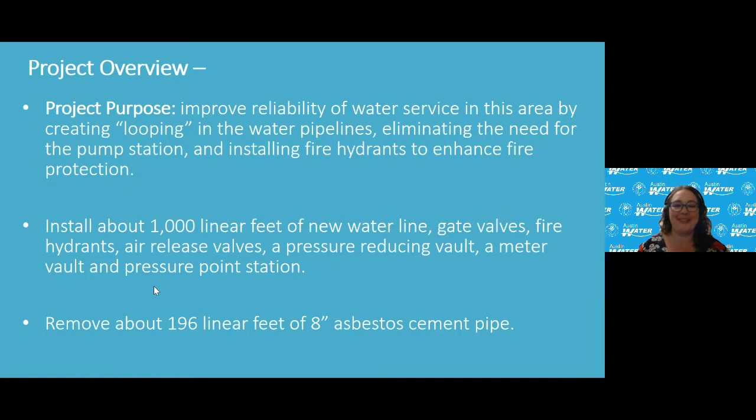Thank you all for coming in tonight. Let me turn on my video—sorry if I'm trying to make better light. Okay, the project overview: the project purpose is to improve reliability of water service in this area by creating looping in the water pipelines, eliminating the need for the pump station, and installing fire hydrants to enhance fire protection.

The project is going to install about 1,000 linear feet of new water line, gate valves, fire hydrants, air release valves, a pressure reducing vault, a meter vault, and a pressure point station. We're also going to remove about 196 linear feet of 8-inch asbestos cement pipe.

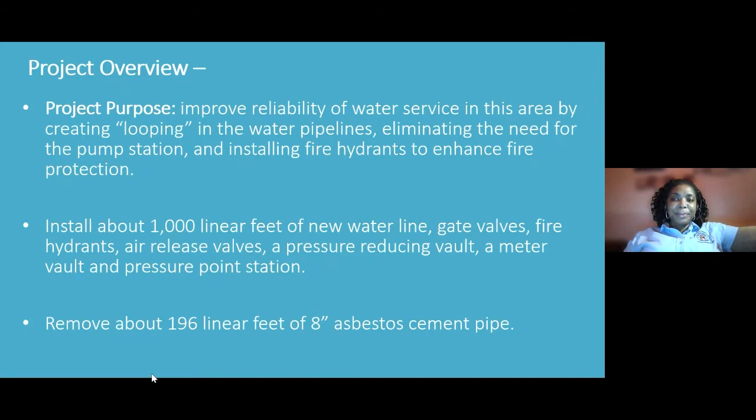The project also consists of constructing a ductile iron water main connecting to 2 different water pressure zones to provide redundant water service to the area. Currently, 16 residents receive water from the pump station. A back loop to this area provides flow to the residents and backup flow to the other residents downstream. Flow meters are proposed as part of Austin's leak detection program.

Instrumentation, supervisory control, and data acquisition, and appurtenances are proposed to provide automatic digital data transmission to Austin Water Central Command Station to help quickly identify unusual high water demand, which will indicate a potential break.

The existing water tanks and pump house will be decommissioned and removed from the property.

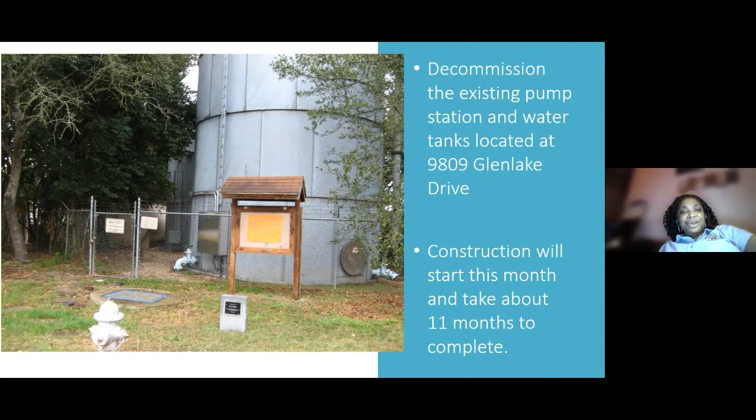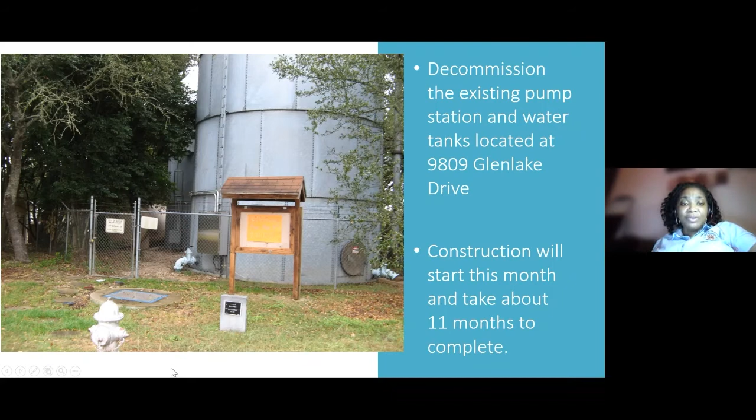The project is primarily in the City of Austin right-of-way, and during construction, detours are proposed for lane and intersection closures which will be administered. At no time will there be a situation where you have no access to your properties. Delaying execution of this contract would prolong substandard facilities and could result in disruption of water service to the residents. So that's why this is an important project for the water utility.

Emily, would you like to go back to say anything else? No, I just had the map up now.

Do you want to kind of describe the map a little bit? Okay, I'm trying to pull up my screen. Sorry.

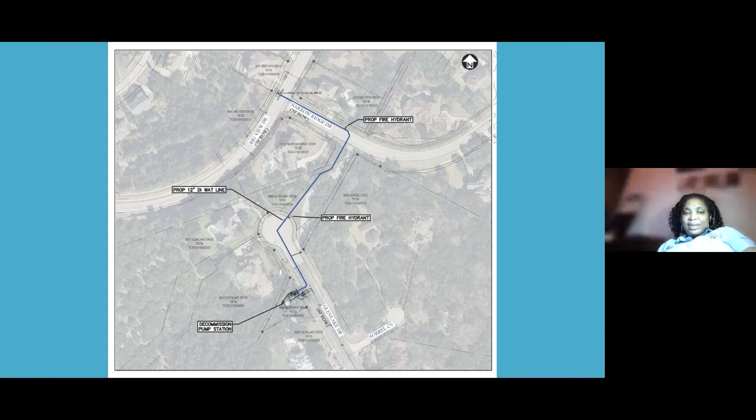Would you like to go in and think about the map of where the locations exactly are? Yeah, I think the project...

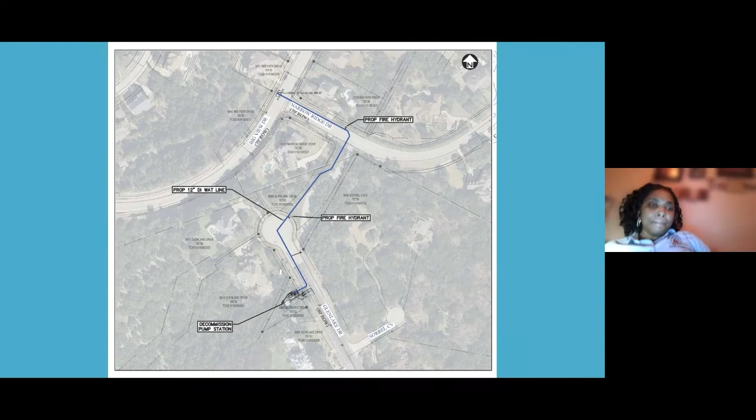We will mainly install the 12-inch water line. On the map, that's the blue line, the water main, and then connect the water main to the existing pump station. We will install 2 fire hydrants, one on Narrow Ridge Drive and one in the cul-de-sac of Glenlake.

After the install, we will temporarily remove the big tank first, and then install the PRV and flow meter. After finishing the install and connecting to the water main, we will demolish the small tank. Then the last step is to remove the asbestos cement pipe under the pavement.

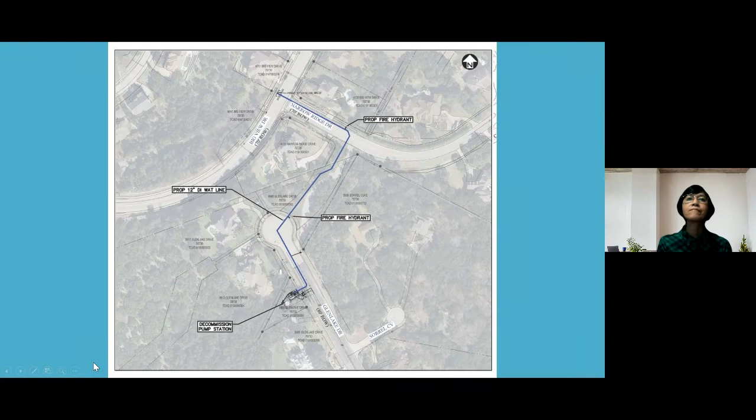Okay, and Mr. Tiger, are any of the contractors online, or would you like to go in and explain anything pertinent that the residents should understand as we move forward? Do we have a contractor available? Going once, going twice? Or I'll be happy to step in.

Can you hear me? We do now. I think they just came online. Okay, thank you. So you can hear me, sir? Please go ahead, we hear you. Please move forward.

Okay, I just want to say that as far as accessibility, I don't see that affecting any of the residents. The water line goes on the edge of the road, so they'll have plenty of room to get by. It's just the water line that's going to be on the street. Most of the other work is inside the pump station site, so that won't affect anyone.

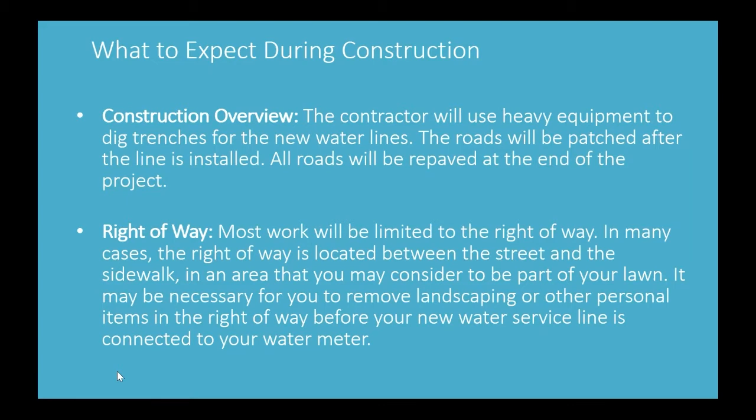Thank you. We do have a couple of slides here about what to expect during construction. Tamira, would you like for me to present those, or can you come back to it? That will be fine. I can chime in if there's anything I need to add. Thank you very much, Emily. Sure, I'll be glad to cover these.

So just an overview, the contractor will use heavy equipment to dig the trenches for the new water lines. The road will be patched after the water line is installed, and then all the roads will be repaved at the end of the project. So you'll see them making progress in sections. They will patch it after they get the line installed, and then there will be repaving at the end.

Most of the work is in the right-of-way. Sometimes the right-of-way is a section that's just at the edge of your lawn, so we want to make you aware that work will be in the road and at times in the right-of-way. If you ever have a question about where that is, you can contact us, and the inspector, Carlos, who will be out there, would always be able to talk with you about that.

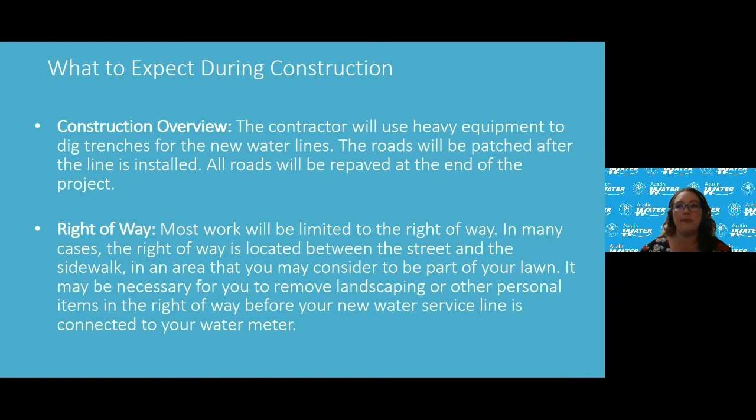It's already been mentioned that they will close a section of the road to do the construction, but you'll be able to pass, and we will make sure you have access to your property when they need to work in front of your driveway to install the water line. The contractor or our project inspector will coordinate with you and let you know so you can move your vehicle. We want to make sure you have access when you need it.

For folks who are along the new water line, at some point the water will be turned off temporarily for your service line to be connected to the new water main. We will give you 48 hours notice with a flyer left on your front door, and we'll coordinate with you. That's typically one day for a few hours.

There could be an emergency outage. Sometimes when we're doing construction, lines break. If there is a break in the line, it will be treated as an emergency and your water will be restored as quickly as possible. And then we have on the slide here the work hours that are in the contract for this project.

We want to mention that we are aware of the COVID-19 situation. Austin Water construction projects support critical infrastructure, so we are able to continue these activities during this pandemic. There are significant safety requirements in place for all our contractors and city workers, including wearing face coverings and maintaining 6-foot physical distance when possible. Sites with more than 10 active workers have to stagger shifts, and all work days begin with safety briefings and checks for personal protective equipment. Hand washing is required with a hand washing station on site, and work sites must provide single-use disposable paper towels and no-touch trash receptacles. So we are working safe and looking to make sure we continue to do that.

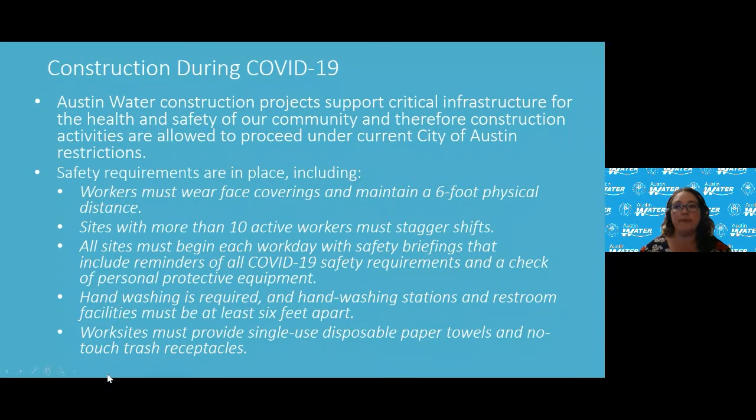I'm going to shift gears to make you aware of an unrelated project that Austin Water has underway that will be in your neighborhood soon. It's called MyATX Water, Austin's Smart Water Meter System. We kicked off a pilot project this summer, and the Glenlake area is one of the lucky ones to be in our pilot project. There are 5,000 customers in this pilot who will receive their new meters first in the city. This project will replace our analog water meters with electronically read meters connected to a wireless network.

We'll also have a customer portal that customers can use to get their water use data. On a daily basis, you'll be able to log in and see how much water you've used, and you'll be able to sign up for alerts so that if you're exceeding a certain amount, or if the system detects you might have a leak, you'll get an alert. We're looking forward to providing this improvement to our customers, and I wanted to mention it since you'll be seeing us out in your area in the coming months making these installations.

When it is coming to your area, we'll be mailing information to you and also providing information on your door after your meter has been installed. If you want to see more, you can go to the project webpage, myatxwater.org. This is just a little more information about the pilot—it will be out in the Glenlake and River Place area later this calendar year and early into 2021.

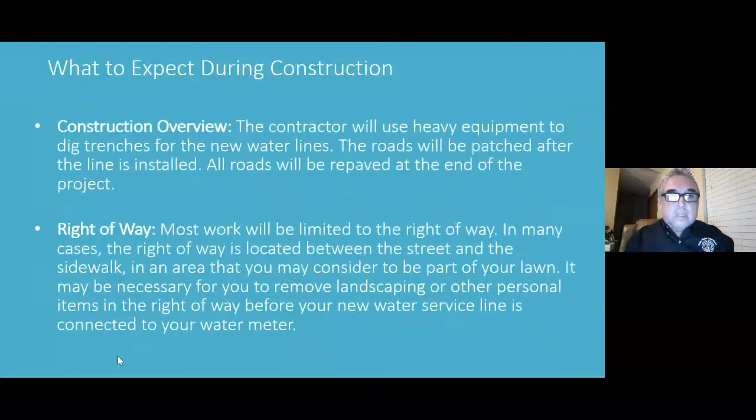Can you put the map of the water line back? I just want to let everybody know—as far as I know, the contractor will be starting on Big View Drive, and then they'll be heading north on Narrow Ridge Drive. A lot of the residents will start seeing a lot of the traffic control set up. The traffic will still be able to go in and out, but I just want to let everybody know that's where the contractor plans to start.

Thank you, Carlos, that's a good clarification. I'm trying to point my mouse here—yeah, Big View Drive and Narrow Ridge Drive. So that's where the work will start, and then we'll proceed in this direction with the water line installation. That's correct. Thank you, great.

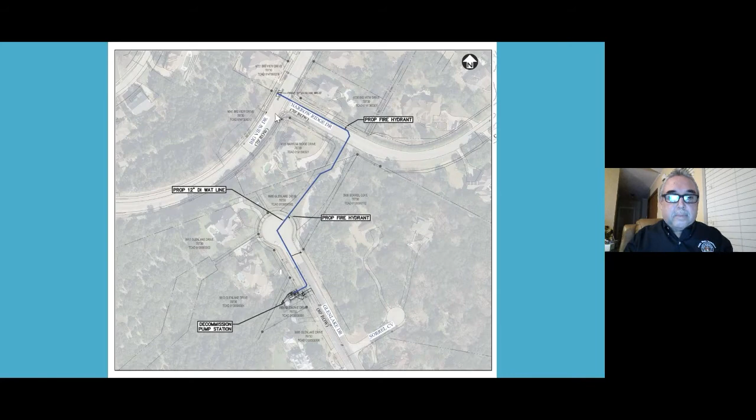Does anyone else on the project team have additional information to add before we start getting into the questions? Yes, this is Tiger Davis.

Yes, go ahead, Tiger.

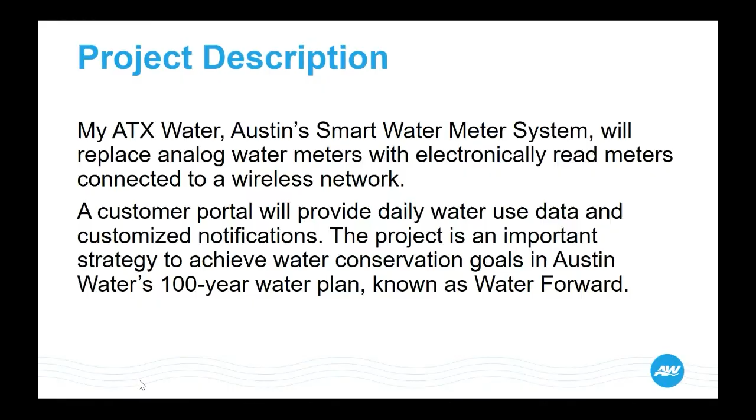Thank you. I've heard a few concerns. One is traffic control. We will change a lane, but we won't restrict access to your home. If we do need to for a few hours, you'll be given plenty of notice, and the anticipated time of any water outage while we switch over is very, very short. Also be aware, some people are concerned about their pressures.

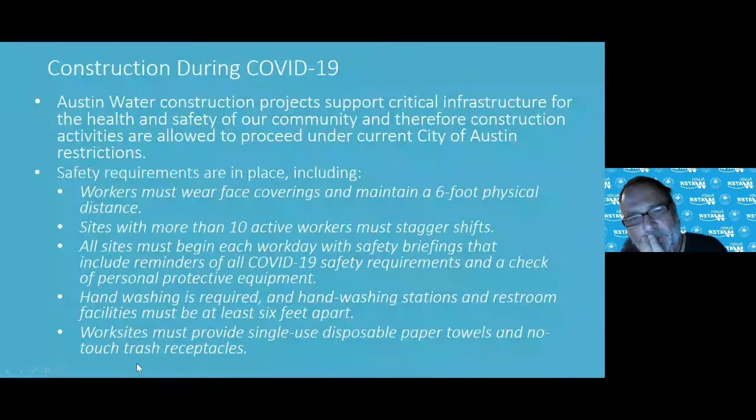The pressures will generally improve, and the reliability is greatly improved due to a redundant source. And the line that's coming in, could you go back to the map again for one moment, please? Yes. I wish we could point remotely without taking control. Yeah, I think that my mouse, if you'll describe it, I'll try to point it.

That's all right. So up there where it says proposed fire hydrant in the northern part, follow that down just south of that line. You see that tree line? That's a fire access road, and a lot of the neighbors really enjoy having that, because at the end of Glenlake Drive, they hit that cul-de-sac down to your southwest.

And I understand a lot of people like to cut from Narrow Ridge to Glenlake, and we don't really anticipate blocking that at all. We want to leave that open for what it was intended for, primarily as emergency access egress. So traffic control, not a problem. Pressure's not going to be a problem.

And then finally, in this transition, the reason we're starting up there at that Big View Narrow Ridge intersection is we need to tie into the two different systems before we do anything to start decommissioning the pump station and the hydropneumatic tank. So we're going to already have our backup before we start decommissioning the old system. That's all I have.

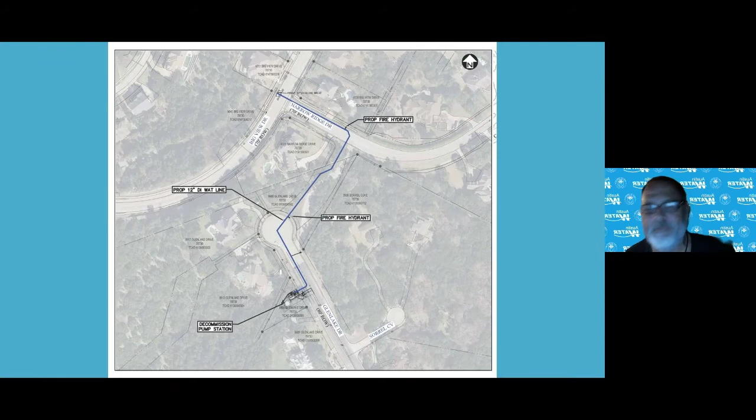Anyone else on the team want to make some comments before I start reading the questions?

Yes, ma'am, it's Demira. I just wanted to say that with the instance of private residential places, if there's anybody on the line, or there's certain places within the project, if there's anything that comes up where we're in your area and you may have property landscaping things that are in the right of way, please contact me and we'll work with you to get through those things. And if there's anything that comes up, please contact me directly.

I believe my cell phone number is on all of the information that's on the websites, and if not, I'll make sure Emily has those on there as well, because we would like to work with you all to make sure that you all maintain access at all times throughout the project, and also to just work through those little minute things that may come up where you all may have landscaping things in your properties or areas, and just work through those. So if anything comes up, please feel free to give me a call on my cell phone or email me.

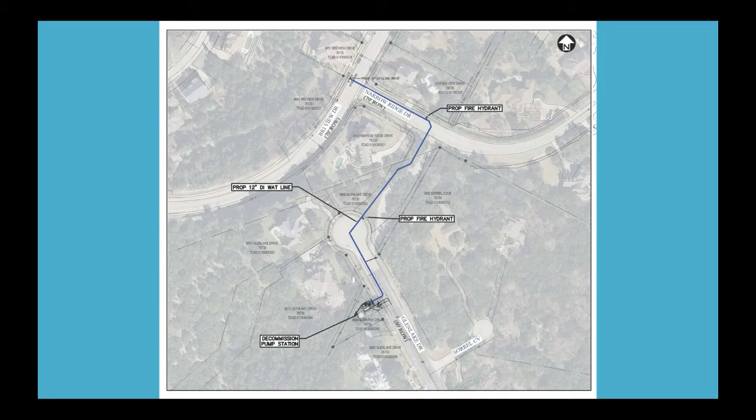Okay, so our first question is, because the traffic from Glenlake to Narrow Ridge is high, how will this intersection be kept safe? So from Glenlake to Narrow Ridge.

This is Tiger Davis again. That's actually a fire access road. The public is not restricted. There's no gate on it, but that road was fully intended to be an emergency egress road, and we want the neighbors to use it if everybody's happy with it. But the fact of the matter, as you can see, it's not a fully developed road, and it belongs to the neighborhood. Austin Water has no interest in the control of that, and we're certainly not going to block it.

And we're going to try to keep it open the whole time. But as far as it being a high volume of traffic, I would suggest you work with your neighborhood association, and if it's considered it needs improvements, that would be something the neighborhood can address at another point. But it really is not a fully developed road.

Okay, and of course I would just like to also add that there's the aspect that we're working with Travis County emergency officials, as well as Emily notifying the neighborhood associations, as well as with the city of Austin. So there's different entities working together, so it would just be a matter of us working together to get all those things taken care of.

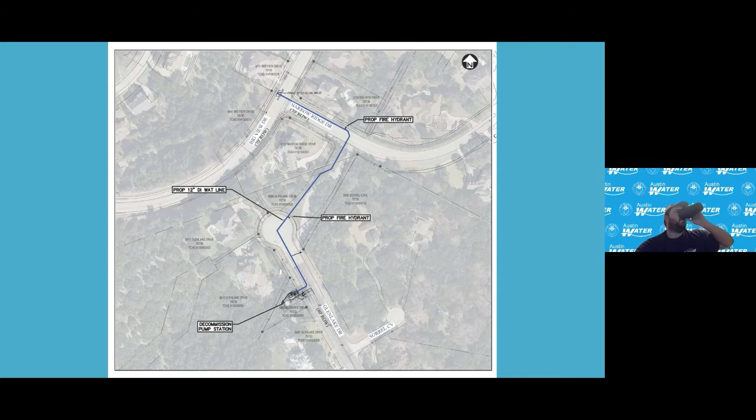Thanks, Nolan, appreciate that. The next question is, will there be times that the 911 cut-through road is closed due to construction? I think we've answered that we intend to keep it open during construction. There's also a question, will you remove the water tanks when you decommission it?

So who wants to address the water tanks? This is Tiger. Yes, once the other system is fully hooked up, as Nolan just described, we will be pulling out the little pump control station, the water tanks, and the hydropneumatic tanks. Basically, almost everything sitting there.

We are going to be putting a pressure point so that we can monitor the condition, as was described earlier. We want to know if we get a sudden pressure drop, as we're sharing pressure from one system to another. It's more likely the pressure reducing valve could fail and you might get a little extra pressure, but that's not going to happen either. It's almost going to be invisible except for the transition. Once we swap over, this is going to be basically what you had, but more reliable.

That's all, thank you. The next question was again about the 911 drive remaining open, so I think we've addressed that.

Linda tells us we have a smart water meter and it works well, but the installation caused a bad leak. What is being done to make the installation robust? I know some folks in this area were part of a very early pilot where Austin Water was first testing out these smart meters, so that may be what you're referring to.

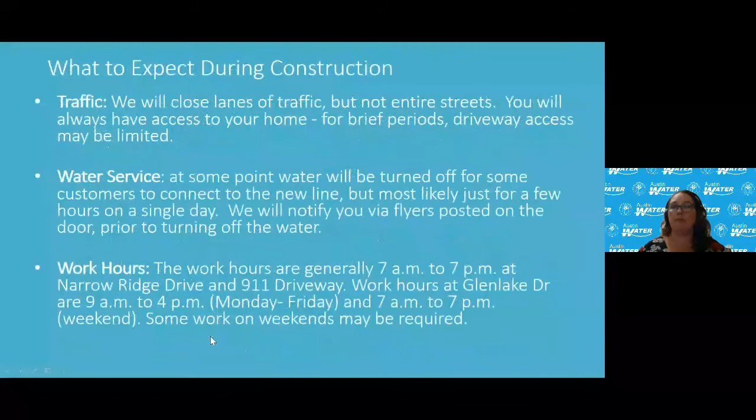Emily, this is Tiger. If you go back to the map, please. Sure. Okay, we're back on the map here.

Okay, maybe the customer that proposed the question... usually ESD is emergency services, but in this case maybe they have another acronym in mind.

And with these questions, Emily, and with everyone else, correct me if I'm wrong, there will be a form that will come out that will provide answers to questions we may not have been able to answer. So we will do a record. We are recording this meeting, and we will post a recording on the project website, and we will definitely post any additional information if we don't have the answer to give tonight.

Hello. Okay, so I just want to let everyone know that if your question doesn't get answered tonight, there will be something else where you can go look for your responses too. But, yeah, and I think someone's maybe trying to say something.

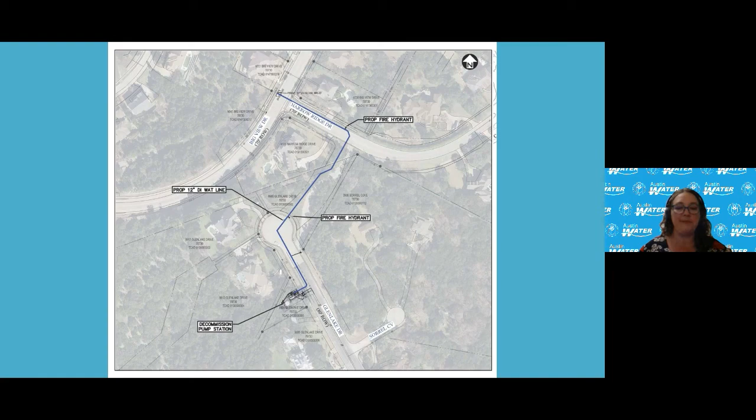I had on the screen earlier the contact information for our team, which was also on the letter you received, and it's on our project website as well. We want to be very responsive. There will be some disruption during construction, but we're happy to bring this improvement to your neighborhood, improving reliability and modernizing this part of the water system.

This is Tiger. Thank you. I would just like to say— oops, sorry. Go Tiger, it's quite all right, Demir. We obviously have a little delay, and that's quite all right.

As far as noise, this is really one of the lowest intrusive projects. We're required to work within stated hours unless it's an emergency, and we're not expecting too many surprises. Sometimes there are unknowns in the ground, but this is going to be a pretty straightforward project. The community is really going to enjoy what's happening here—this is a significant improvement in redundancy and reliability, and maybe a little more pressure, but certainly fire safety.

Thank you, Nolan, for bringing up that fire hydrants are for more than fighting fires. We use them to flush lines, burp air, and for all kinds of purposes. Current standards call for hydrants every 300 feet in most cases, and we're meeting current standards. Every time we touch an old system we bring it up to that standard, and we're getting rid of that old asbestos cement pipe—in the 50s we built lots of pipe with asbestos cement, and every time we touch it now, we get rid of it. So the community should be very pleased with what's about to be done.